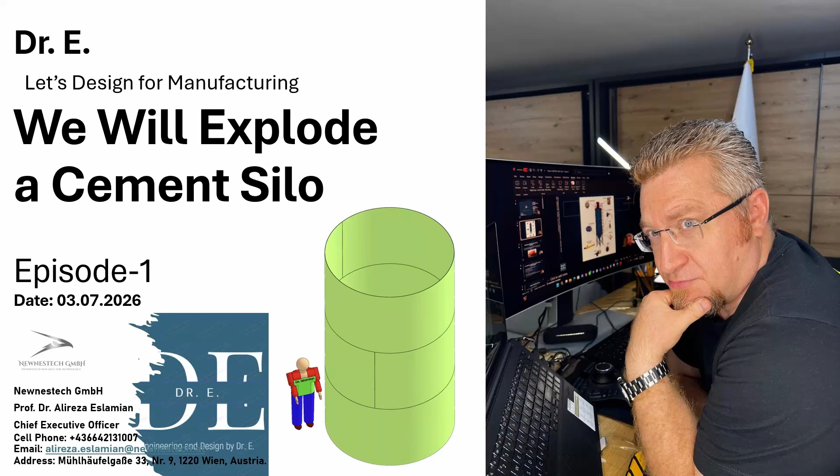A cement silo looks like a simple upright vertical cylinder, right? Today I will dive deep into the design of this heavy equipment and I will decipher the complexity inside.

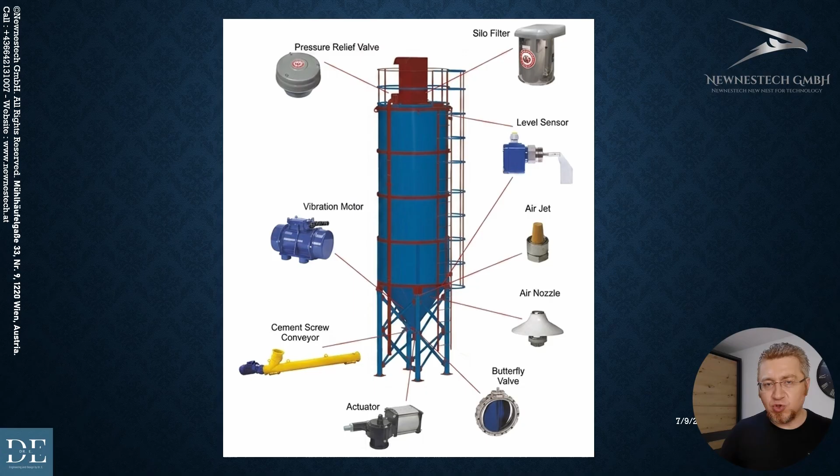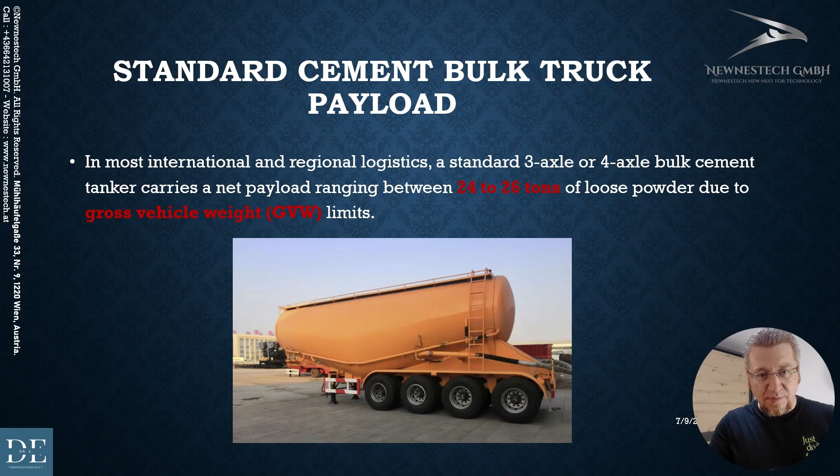Okay, let me now explain why I selected 28 tons as the capacity for our storage cement silo. Once we are ordering the cement directly from the factory, the bare minimum purchase order that we can place there is at least one 3-axle or 4-axle bulker cement tanker carrier, which is close to 24 or 26 tons of cement. So based on that, we are making the bare minimum dimensions for the silo to make it economically viable, and this is why we selected this volume.

Perfect. Now let's check the volumetric density and also the dimensions. For the cement, the loose bulk density will be close to 1.25 tons per cubic meter because of the entrapped air. And since we are considering 28 tons of cement, with the density that we already mentioned, the volume should be at least 22.4 cubic meters.

We will add 12% expansion space at the top that is important for compensating any changes in the pressure, especially during the filling, so that we end up with 25.1 cubic meters. And this is the volume that we will use as a base for sizing the diameter, the height, and other parameters. In the next slide, we will see how we will deal with it.

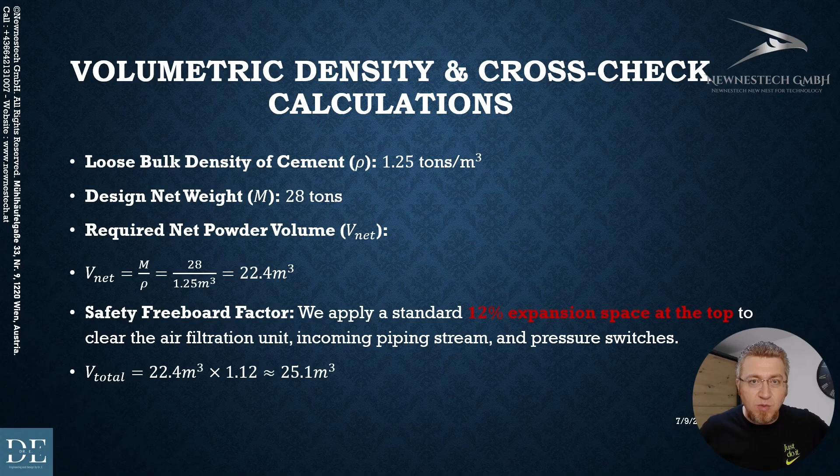We will consider 10 to 15% buffer factor. Why are we considering this volume? Because once the truck is pumping the entire load under pneumatic pressure into the silo, we might face the high-level alarm, we might face choking of the top venting filter, or maybe overpressure or underpressure. So to avoid all of these things, we'd better have the safety buffer factor, that is 10 to 15%. We will see that adding 2 to 4 tons extra capacity to the silo will actually add to the safety of this device.

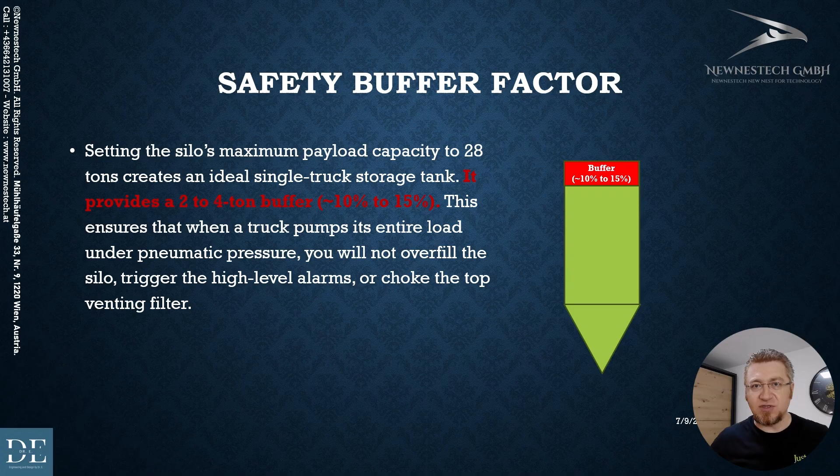Good. I also checked the standard market sizes to see whether these dimensions and the volume or capacity of the silo are compatible with what is in the market. With quick cross-checking, we will see that 28 to 30 ton silos are common, and the volume that we consider, 25 cubic meters for the hopper bottom silo, is exactly within what is already available in the market. So this fits perfectly with the standard. This will ensure that it's also compatible with all the truck, trailer, handling, carrier, so we will not face any problem during the operation or finding the parts once we are manufacturing and putting everything together. Good.

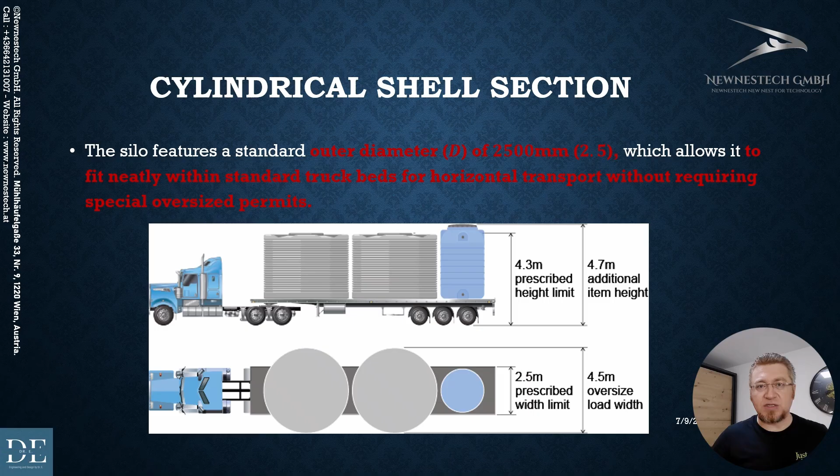Okay, the first thing that we need after considering the volume for the silo is the best diameter for the shell section in the cylindrical part. Here we will consider one restriction, that is the maximum width for normal loads, so that we can use standard truck beds to transport this silo in horizontal shape after manufacturing in some workshops. So we are ending with 2,500 millimeter diameter. This is what we are considering as the first dimension, and based on that we can calculate the height, the dimensions of the conic bottom, and also the top roof deck. These are all based on this fixed number, based on the maximum truck load dimensions. So 2,500 millimeter is the diameter of the cylindrical part.

Perfect. After selecting 2,500 millimeter as the diameter for the cylindrical part, we can now calculate the height and the dimensions of other parts of the silo. For the cylindrical part, we are ending with 4,250 millimeter height, because the conic side should be at an angle of 60. Considering all these criteria for the conic bottom and for the top roof, with the slope that we need to drain off the rain from the deck, you end up with this number. I'm rounding this number up to 4,500 millimeter.

And why am I doing this? Because the widths of the available metal sheets in the market are standard, close to 1,500 millimeter. I don't want to lose material. I also don't want redundant metal works like CNC plasma cutting or welding. That is why we are selecting 1,500, and rounding up to 4,500. This actually adds to the buffer volume that I explained at the beginning of this presentation. So 3 rings, 1,500 millimeter the height of each, gives 4,500 millimeter, the total height of the cylindrical part.

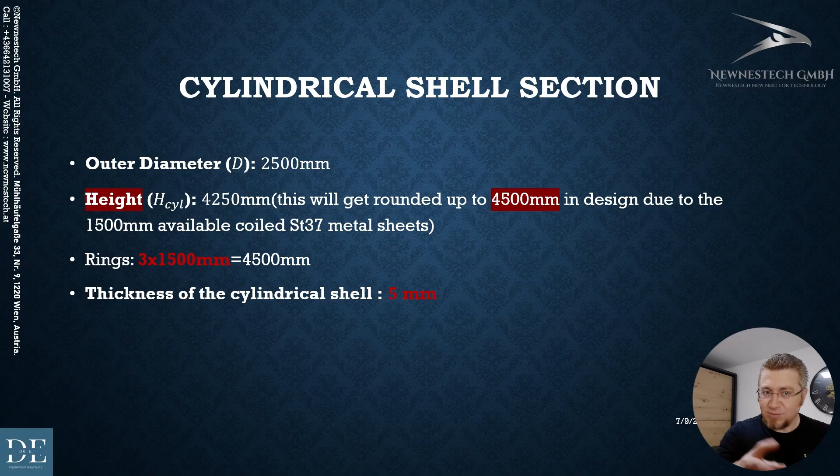Thickness of the cylindrical shell, according to the strength calculation, will be 5 millimeter. In future, we can also come to the calculations of this number and the safety factors that we consider here. But as a rough estimation, just accept that 5 millimeter is good enough for these dimensions according to the standards and what is already available in the market, and I'm considering this number as a default for the design. And we will manufacture, of course, this storage tank based on this thickness.

Great. Now we will have the summary of the key dimensions of this equipment. 2,500 millimeter is the outer diameter. Cylindrical shell height is 4,500 millimeters. The deck roof height is 320 millimeter. The height of the 60-degree conic bottom will be 1,800 millimeter, and the distance between ground floor level and the opening of the conic bottom will be 1,500 millimeter.

And as I mentioned at the beginning of this presentation, when I was explaining the anatomy of the cement silo, I explained that this is according to the standard conveyors, screw conveyors, and the maximum inclination angle that is acceptable with these conveyors to have the maximum performance and to have the minimum electrical energy consumption. Otherwise we will end up with either stocking the cement inside the conveyors, or we will end up with a lot of energy consumption and heat up or temperature rise inside the conveyor. So we should avoid doing that.

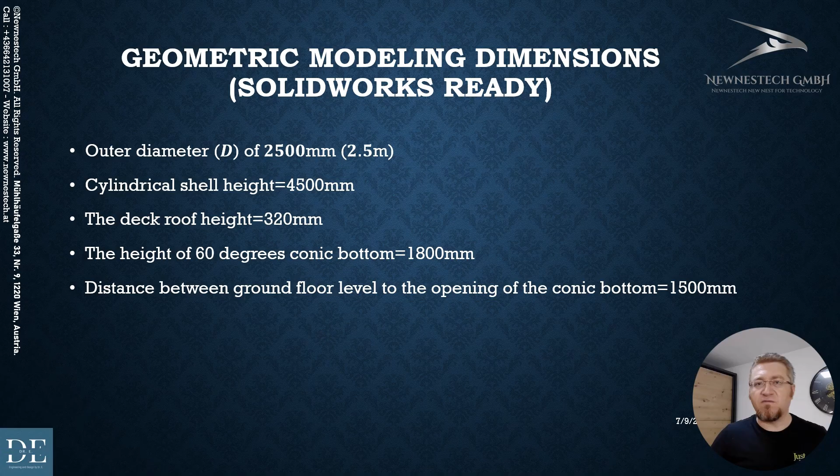Okay, since we are designing for manufacturing, we here need to also have a look into the material that is available in the market. I will use the hot rolled steel coil, HRC, that is actually sold by the factories in big coils from 15 to 22 or 25 tons per coil. And here we have a couple of big advantages. First of all, these HRC coils are cheaper compared to the flat sheet metals.

The second is that we don't need to be restricted within the limited lengths that we normally have for these flat sheets of metal. Why? Because sheet metals normally come in standard lengths: 3 meter, 6 meter, 9 meter, 12 meter, and once the length is increasing, the price and cost also increase. But with the hot rolled steel coils, first of all, we have good ductility for any kind of cutting, grinding, milling, welding, and we are not facing any issues here.

There is also like a memory for the coiling, because these are decoiled, cut, and then again rolled to the diameter that is desired. For example, in our case 2,500. With these hot rolled coil steels, we will use the advantage of this memory that is already in the steel, and also it's more affordable. Price-wise it is more economic.

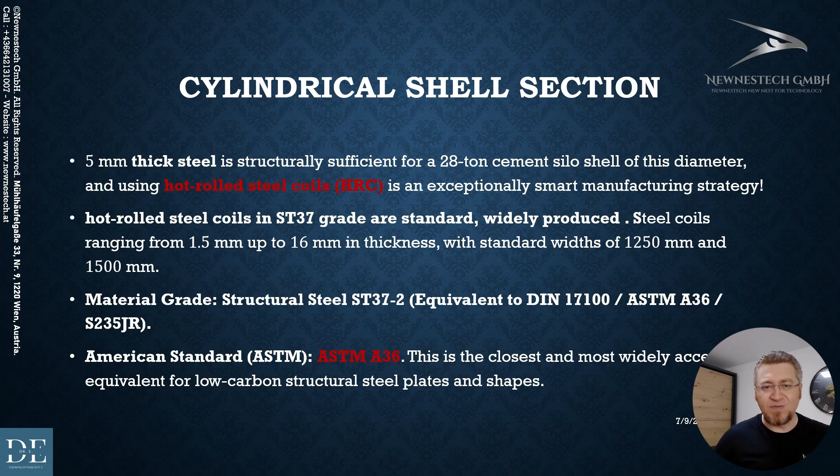The type or the grade that we will use is ST37. That's the old name; the new name we can find as S235, or based on DIN, 17100. Or once we're simulating or designing this in SolidWorks, we will select ASTM A36. It is the closest material to ST37 as a base material that we will consider in our design.

Perfect. Again, since we are designing these elements for manufacturing, we need to also consider the grinding and the welding. Later we will make the detailed documents on how we will do the welding, the sequences, or what we need to consider from the standard point of view. But let's have a quick overview of what we can already show in our design. So first of all is the grinding that we need to do on the edge to make the bevels or the chamfers for deep root welding on the meeting edge once we finish the rolling.

So what we will do, we will first cut one piece of the sheet up to a length of close to 8,000 millimeters, exactly 7,935.2 millimeters. This can be done by a plasma cutting system, or with a CNC cutting system, or any simple torch. And why are we considering extra length of close to 100 millimeters? Because after rolling we will end up with flat ends on both sides.

These flat ends are the areas, close to 50 millimeters on each side, that we will cut and drop after finishing the rolling to have a perfect diameter and curve on the meeting surfaces or the edges of the cylinder. So for doing this, we are considering 50 millimeters, as I mentioned. Then on the edge, we need to consider a chamfer of 30 degrees against the normal line to the surface, as shown here in this schematic diagram.

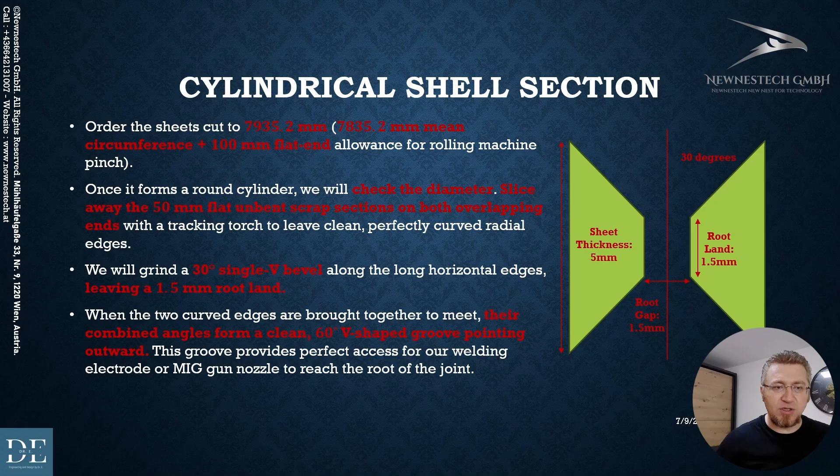Perfect. Here we will review what is the consideration for the welding, like general numbers that we need to know. The root face or the root land is 1.5 millimeter at the bottom base of the plate that I already mentioned. The root gap will be 1.5 millimeter, that we will put the spacer in between once we are fixing the parts together, and then we will start tack welding.

Tack welding, we should not start exactly from the very beginning of two meeting edges, otherwise it will cause distortion or breaking or micro cracks there. It should start somewhere close to 5 or 10 centimeters minimum from the very beginning or very end of this shell. Then every 200 or 250 millimeter, we will implement a tack weld that should be a certain length. It can be 20 to 30 millimeter.

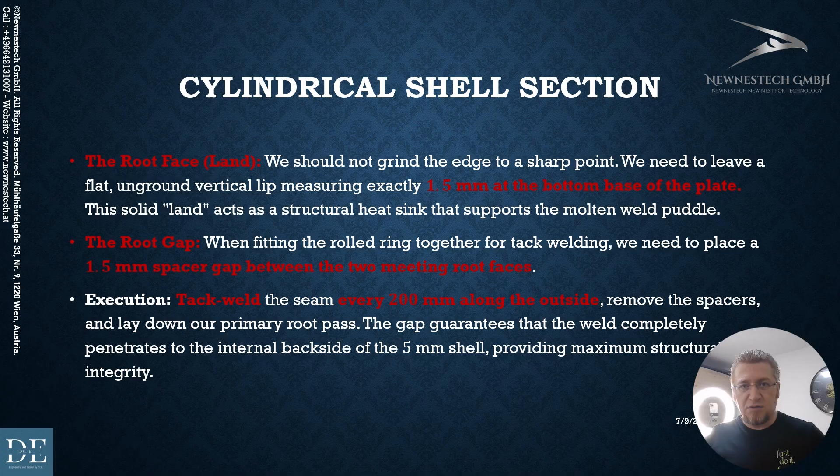And then once we have all these tack welds, we are ready for implementing the full welding on the seams. This is the thing that we will repeat for all the rings. Perfect. Once we finish the welding of all three rings for the cylindrical part of our silo, now we need to also weld these segments together.

We should make sure that we are not aligning all the welding seams in one direction. Otherwise, we will face very weak spots, especially when there is a crossing line of welding between the rings and between the meeting edges of each cylinder ring. To avoid that, we will rotate each ring against the other one. In our case, we have three rings, so 120 degree is the best maximum possible angle that we can consider between the rings to have the maximum distance between the welding seams.

So to do that, once we are designing in SolidWorks, we are considering the first ring at the angle of 0. For example, the front face will be parallel to the front face of the assembly region, and then the second ring will be at a 120 degree angle, and the third one will be 240 degrees compared to the very first ring. Here we are making sure that we have the maximum distance between all rings, and the welding seams have the maximum distance between each other.

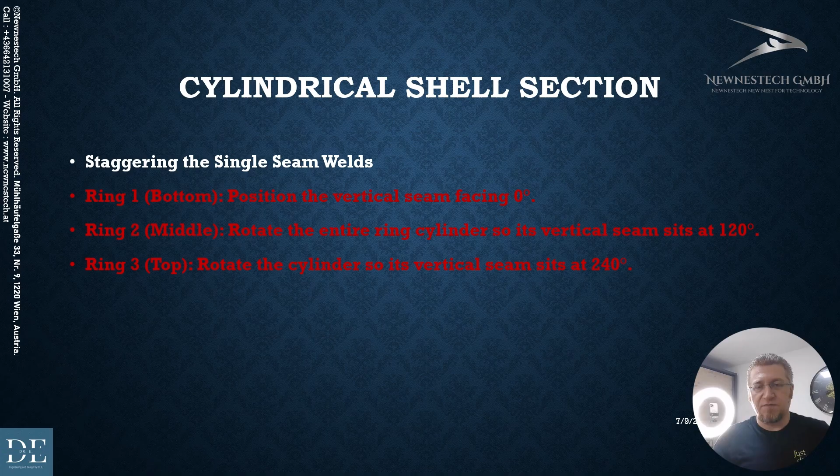Perfect. Now we will initiate the design in SolidWorks. This is by presumption that you are already familiar with SolidWorks. So here we are not going to train how to use the SolidWorks software from scratch, because here we are mainly focused on design for manufacturing.

So by default, assuming you are already familiar with the SolidWorks software, I'm quickly checking the main steps of how you design this equipment on the shell side, and then in the next episode we will add more details once we are ready for manufacturing this equipment.

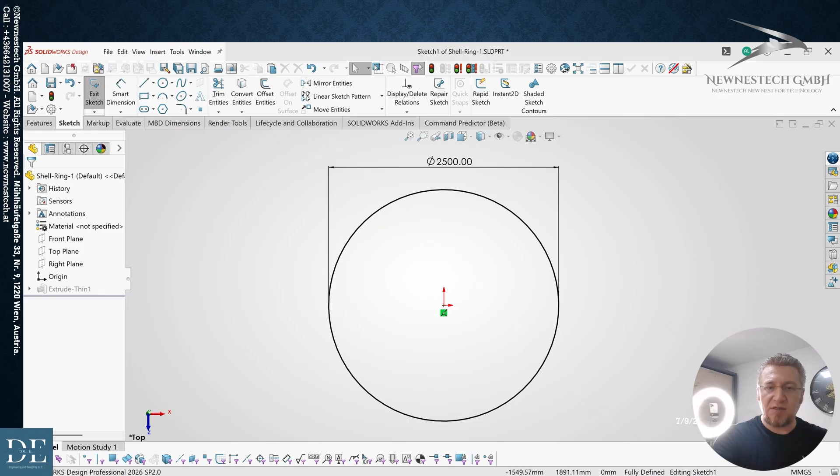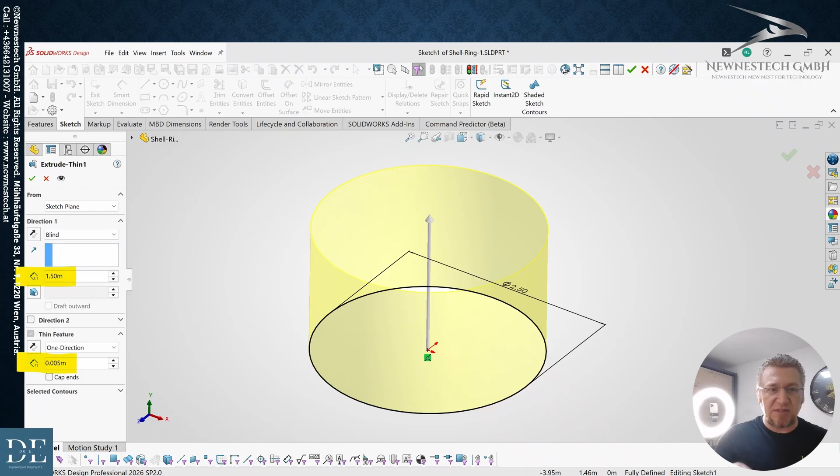So to have the shell, first we start by drawing a circle 2500 in diameter, and then we are extruding. Good. Then I'm using the extrude command to extrude this 1.5 meter in height, and the thickness is 5 millimeter for this element. The 5 millimeter thickness is according to what we considered at the beginning of this slide.

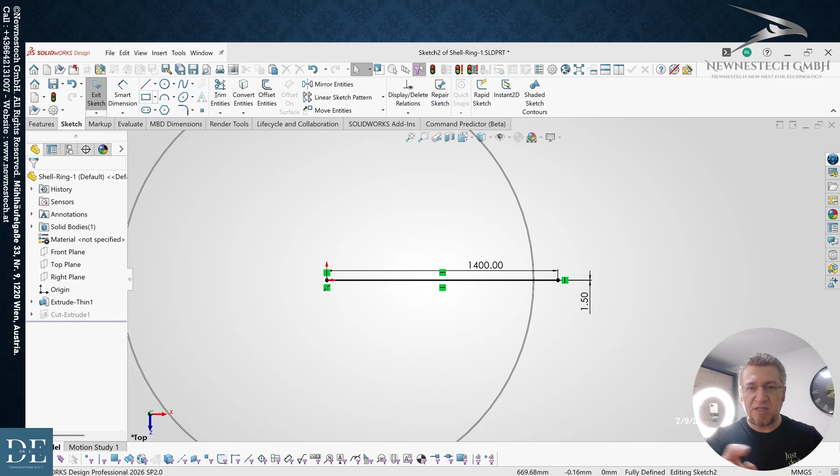Perfect. Now we need to also implement the 1.5 millimeter root gap that we already discussed, which is important for the welding considerations. We will make the documents for the welding, but I also would like to see exact dimensions for the welding spots or welding zones here in my design. So I'm just drawing a cutting rectangle here, 1.5 millimeter in thickness from the center, and then I'm implementing the cut command.

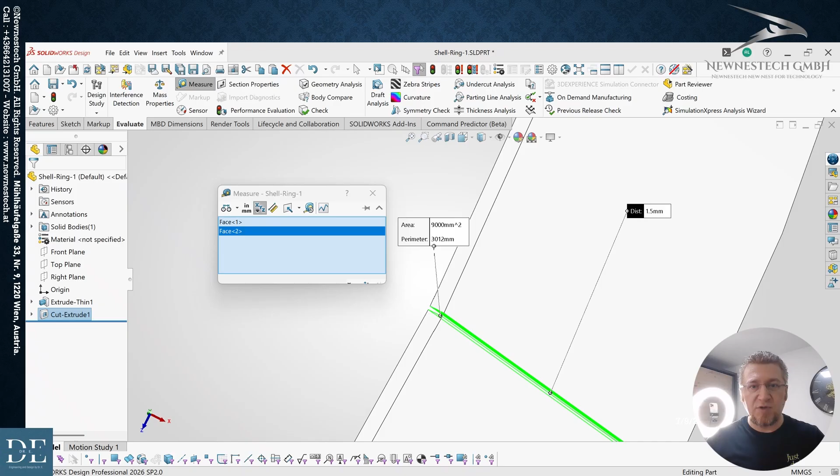With cut extrude, I will cut all through this ring that I generated already, and then this gap, or the root gap, is already generated. Here I use the measurement tool to make sure that the 1.5 millimeter gap is already implemented there. You see that it's exactly as it is there with the measurement, 1.5 millimeter, the gap, I have it there.

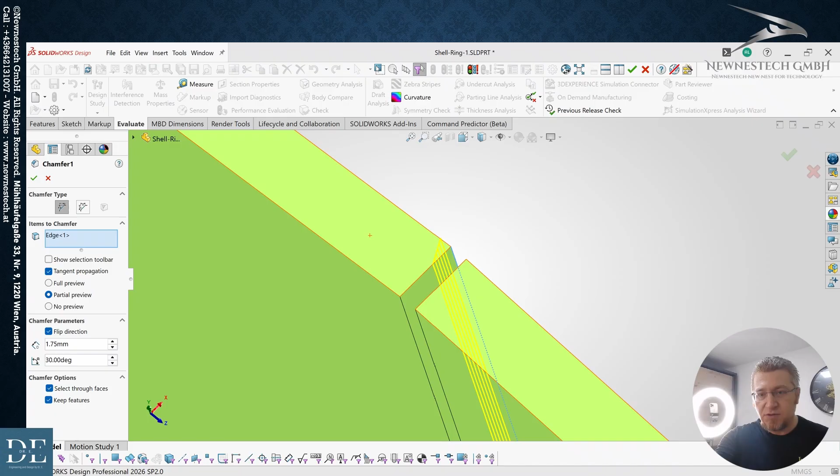Here I'm implementing the chamfers, or the bevel grinding. Since I will consider 1.5 millimeter as the face or the land root diameter there, I'm just putting this aside, and then from the remaining, that is 3.5 millimeter, 1.75 millimeter on each side, I will implement the chamfer or the bevel grinding. 30 degrees is the angle of this bevel or chamfer against the normal line to the surface of the plate, and this is as it is implemented, and you will see how the grinding looks now.

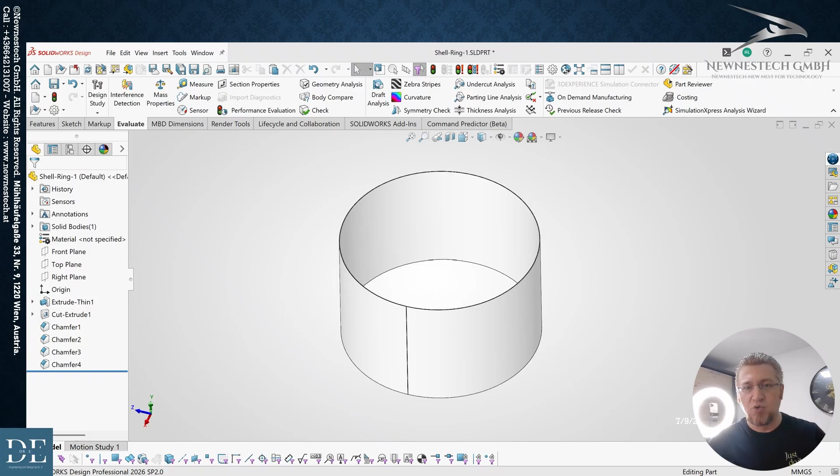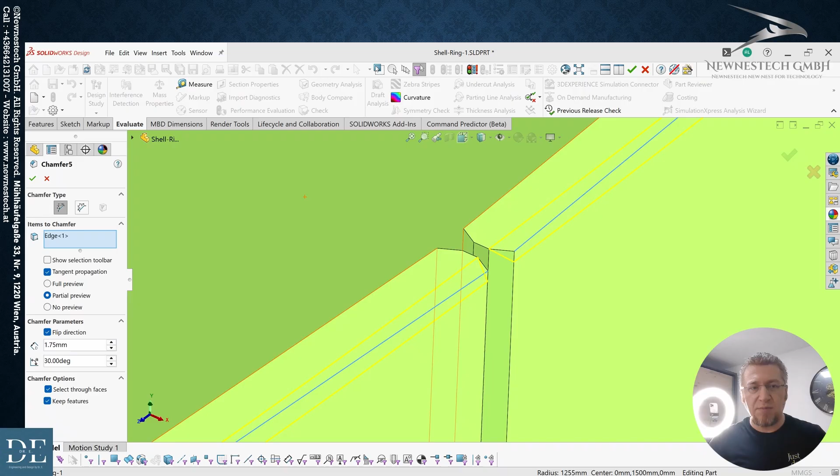It's repeated for all four lines on the meeting edge of two plates, and here we can see it's in a better shape, and this is one perspective of how the ring that we generated looks now. We should implement the same chamfer and bevel grinding on the other edge, where two successive rings will meet each other, or where we will connect the bottom conic object or the top roof deck to the rings. This is the thing that we will also implement. The same angle, the same thickness is implemented, and here we can see how it will look.

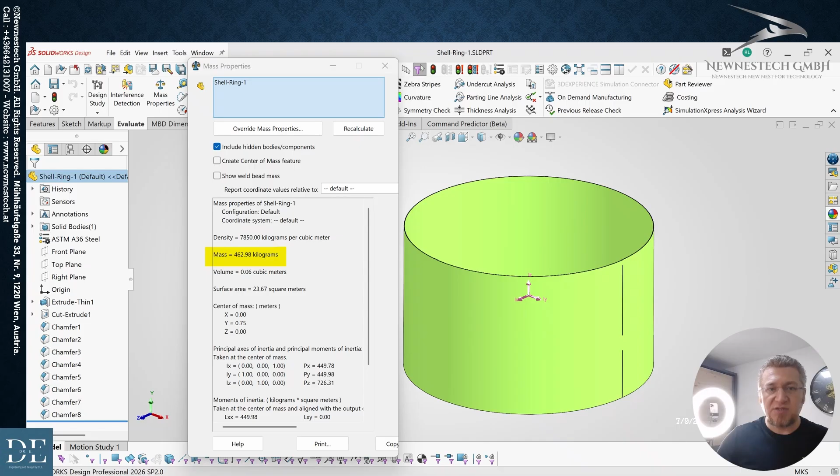Now we have one ring. I allocated the material ASTM A36 steel, that is the ST37, and the mass of this object will be close to 462 kilograms. So for each ring we need to consider something close to half a ton.

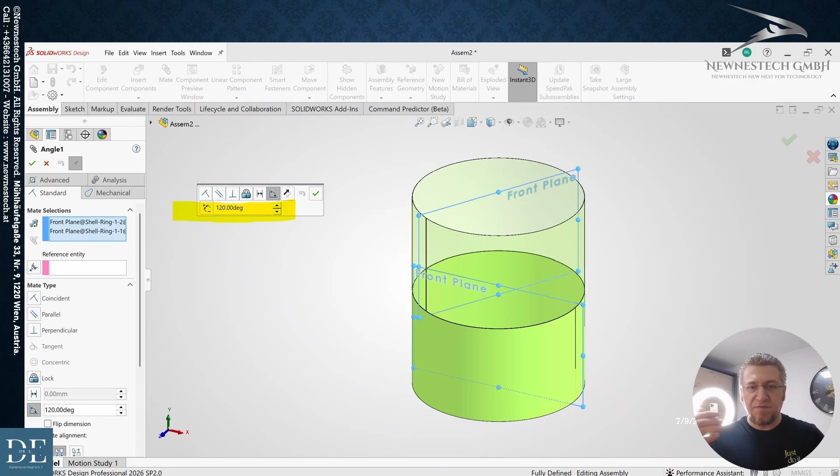Perfect. Now we are continuing by adding the second ring to the assembly. We are creating a new assembly and bringing the first generated ring into it. We just make all the mates for the first ring to the origin, so the origin of the first ring will be completely coincident to the origin of the assembly. And then we are bringing the second ring. As you see, I am considering a 120 degree angle between the front plane of the second ring and the front plane of the base ring.

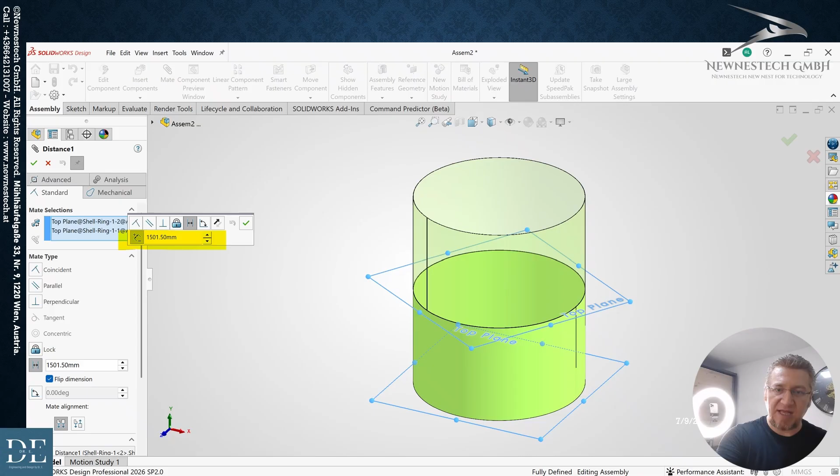With this consideration, we need to have 1.5 millimeter distance between two meeting rings for the penetration of the root welding. To do so, we are considering 1501.5 millimeter distance between the top planes of two successive rings, the first and the second. Perfect. This is how it will look after assembling two rings together.

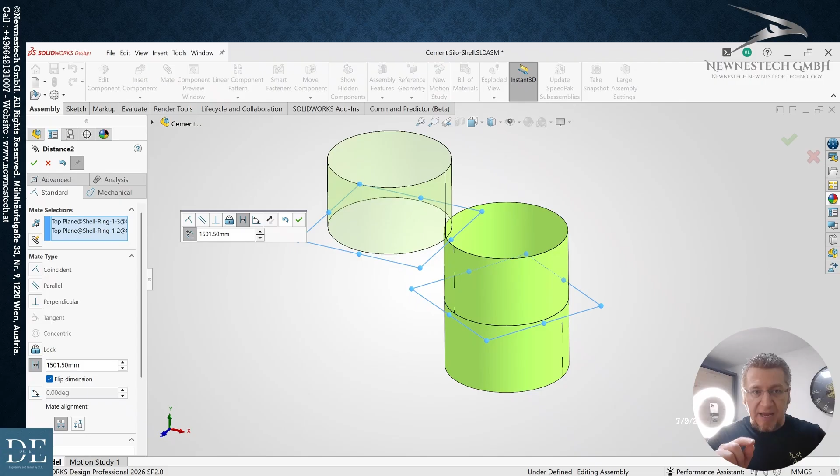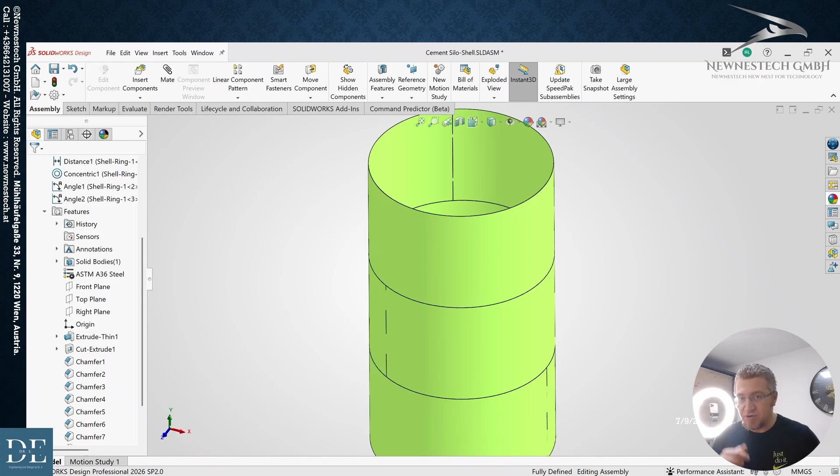Now we are bringing the third ring. Here you see that again, I'm considering the distance of 1.5 millimeter for the root welding gap. That should be the distance between the two rings on the meeting edge. And then I'm also considering, in the next slide, the angle between the very first ring and the last ring, or the third ring, 240 degrees. Now we are making sure that there is a minimum distance of 120 degrees between all welding seams between these three rings. Perfect. This is how it looks after putting these three rings together.

This is the last slide for this presentation, and the end of episode 1. In the next episodes, we will add the other parts very quickly. We will have one silo with all details ready for manufacturing. Let's design for manufacturing together.